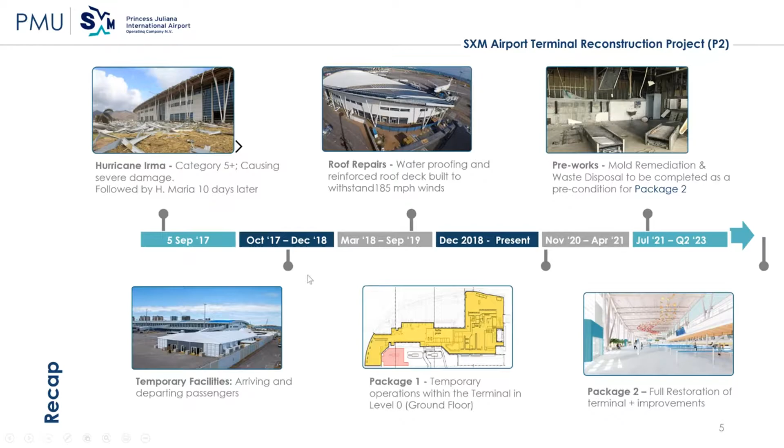As we all remember, Irma hit back in September, the 5th it says here, but it actually was September 6th. Category 5+ that created so much destruction as it went through. I don't believe any of us expected our airport to look the way it did the day we walked through, the following day after that hurricane. I myself, looking at these pictures, still don't believe it, even though I've looked at them so many times already.

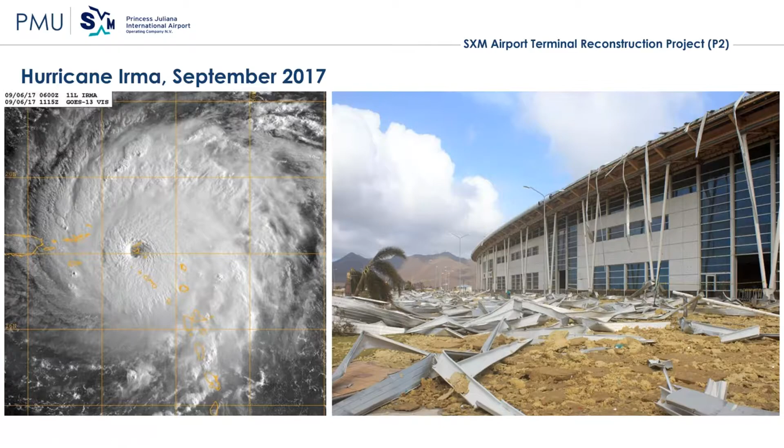But being the resilient airport that we are, we went ahead and opened the terminal back in October of 2017. We put up open tents where we had a makeshift check-in area, screening, security procedures—everything was put in place to allow us to open up.

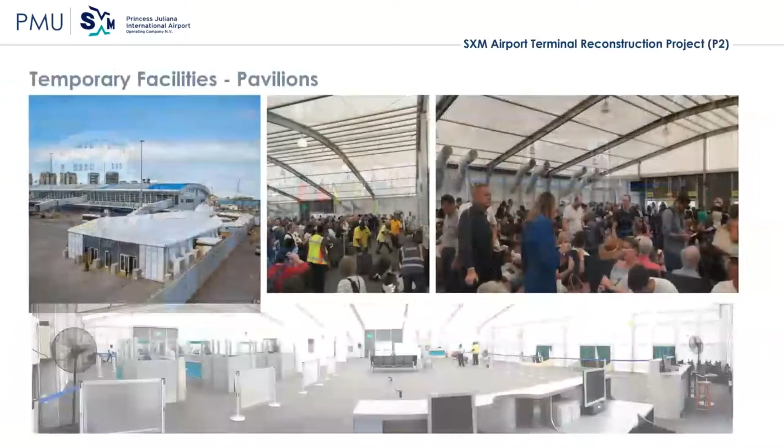Do you all remember we also used the FBO for arrival passengers? That sounds like ages ago, but that's what we did to make sure we had commercial flights coming back to St. Martin. That was not a very comfortable situation. Eventually, we had some large tents we referred to as the pavilions, put in place to ensure we had more air conditioning, more space, and could also accommodate some concessions. But as you can see here, that slowly got congested as well.

At that point, while we were still in the pavilions, we started working on the roof. The roof repair works were put in place, going through 3 phases until completed, from March 2018 all the way to September 2019. The first portion was cleaning up the roof. We started with rust proofing, as well as waterproofing the roof, which allowed us to start with Package 1. In phase 2, we also put in some omega profiles.

That's something like the rafters in your house, on top of the roof. We put in insulation, and we strengthened the roof from 130 miles per hour up to 185 miles per hour, so it's significantly stronger. Last but not least, in phase 3 we put in the soffits, the under portion of the canopy, as well as the bull noses, the round caps around the edges. We also put in infrastructure for some lights, so at night we can light up the canopies.

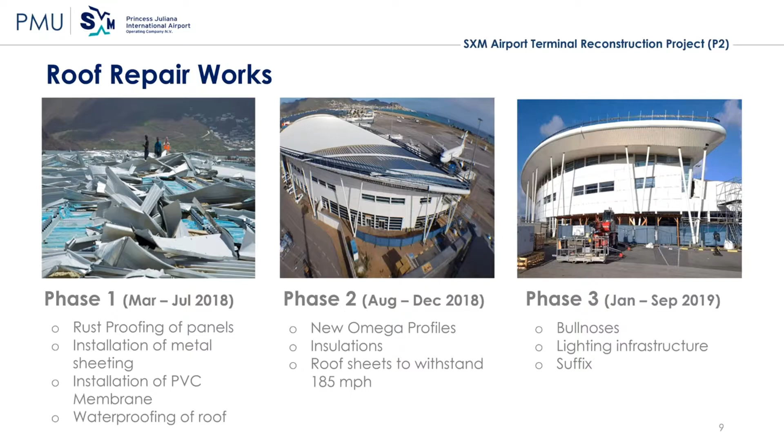Eventually, we were in the building, package 1. Package 1, as you all know, that's what we're living right now. We're only using a third of the building, and it's only the ground floor.

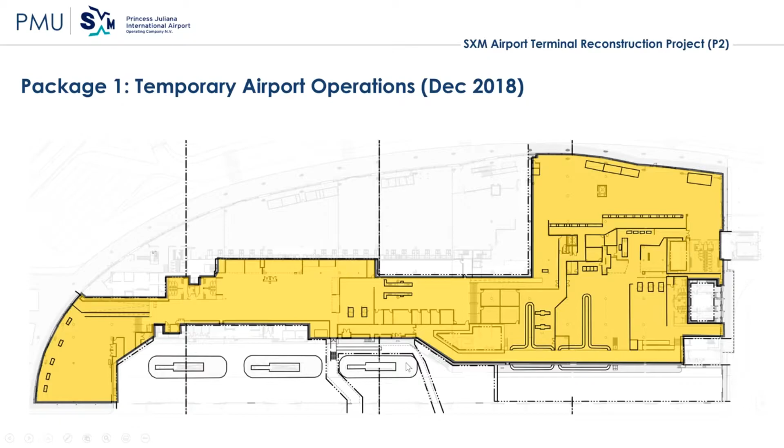Eventually, package 1 was not large enough, so we moved over to package 1A, where we put in the temporary extension to the B gates.

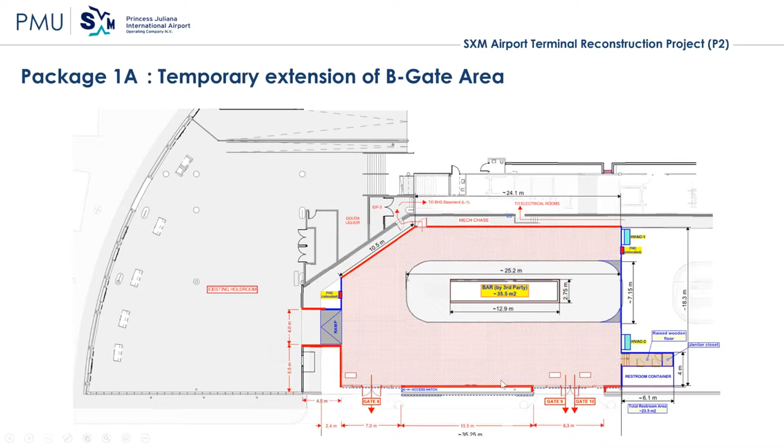There, we were able to get 3 additional gates, an additional restroom, and a bar. The whole area was air conditioned. Basically what we did was we took what used to be the baggage makeup area, removed a belt, and created a very comfortable waiting lounge. I'm still amazed at how beautiful the fixtures came up on the wall.

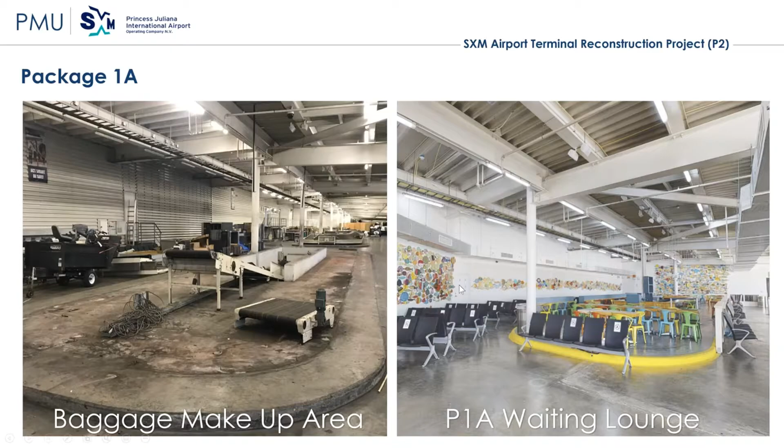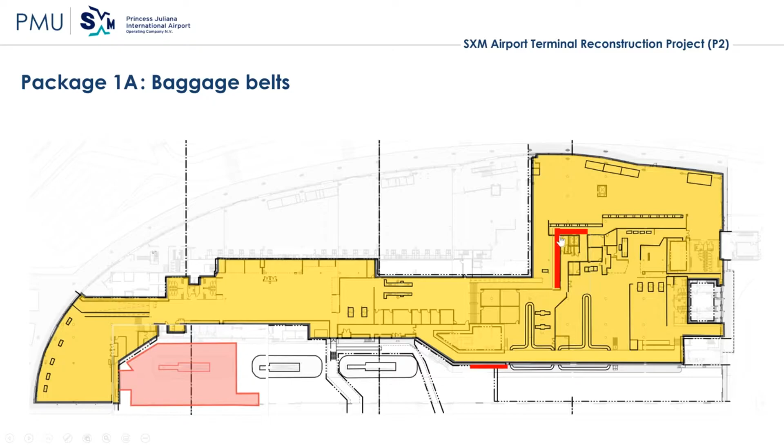During that same extension to package 1A, we also put in some infrastructure for Menzies, because all of the bags normally were taken from the front, walk through a narrow corridor to the screening belt that we have, and that was a very congested walk. Took quite a while, and by using some of the belts that we had in the old check-in area, we relocated it to package 1 and created an easy transition for bags now to move from the check-in counter to the back in screening.

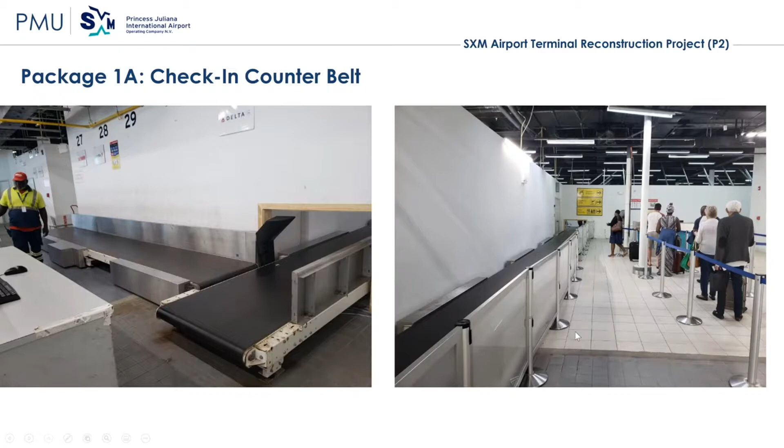Then we're ready for package 2. But for us to be able to do that, we started to team up with the World Bank. So let me give you a little bit of information on what's going on there.

Back in September 2019, we got the approval for the World Bank loan. In December, we actually signed it, but it did not become effective until April 2020. When I said effective, that means the funds were now available for us to be able to start using.

With the World Bank and the EIB, we came up to $129 million. 122 million, 50 from the World Bank, 50 from the EIB, 22 from the World Bank, plus our counterpart, 7 million, came up to 129 million.

The funds were given from the government of the Netherlands, plus the EIB, because the World Bank is actually the one who's dealing with the money from the government of the Netherlands. This was actually given to the government of Sint Maarten, and the World Bank is the one managing it.

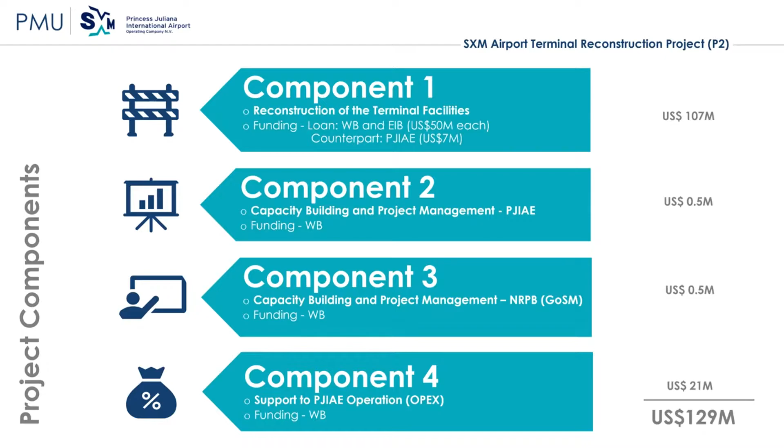The project goal is to safeguard the project, making sure safety and security is carried out, because this is a project we will be phasing from one location to the other. We need to ensure that we do not break any of the safety protocols, and security is still up to par. We also have to make sure that we remain within budget. We're trying our utmost to ensure that cost overrun does not play a part of this project.

We also need to ensure that the local contractors get an opportunity to participate on this bid. If you go to our website, sxmairport.com, there's a tab construction. This will allow you, as a local contractor, to register your company. This has been shared with those who are bidding, so they know which local contractors were actually interested. This was a partnership with the Chamber of Commerce, so we made this link available so that the bidders will be able to tap into the local market.

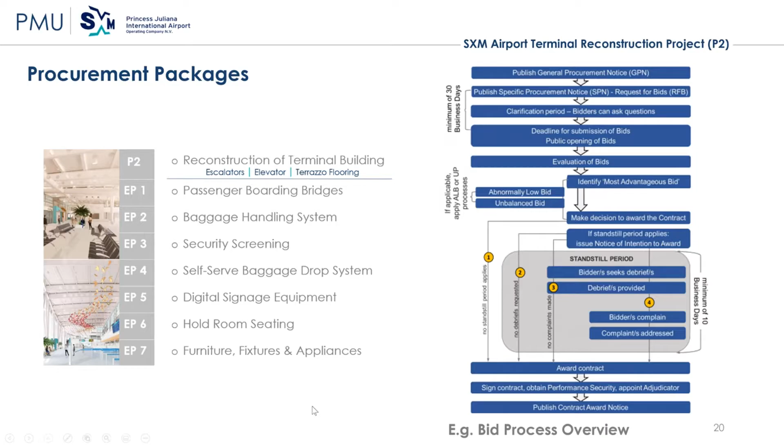Because of the World Bank as well, we needed to ensure safeguarding through the environmental safeguard framework, which is from October 2018. In there, we had to put in our COVID-19 safeguard strategy, where we are ensuring that we screen our workers, maintain physical distancing, how we're going to be able to sanitize, and ensure that COVID-19 protocols are carried out during the project. We also needed to include a grievance redress mechanism.

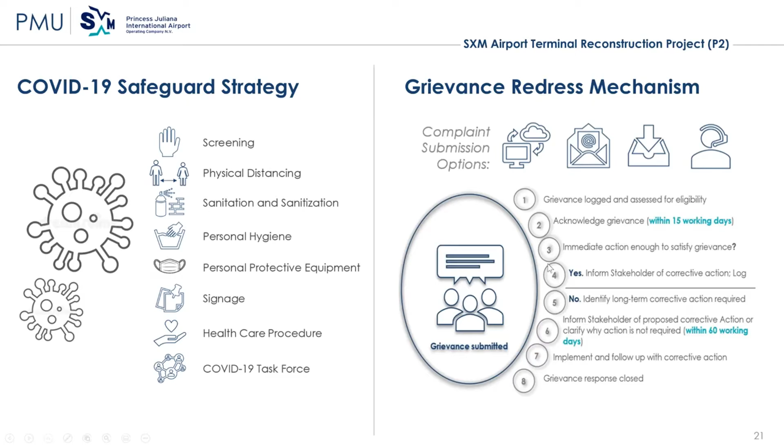This is a complaint form. Anyone who is associated with the project, or even anyone who wants to complain about the project, be that airline workers, staff in the airport, or someone from the community that has a problem, a question, an objection, or a concern about the project, can log on to our website at sxmairport.com. Under the documents, you will be able to file a grievance with the airport on the project, and we will get back to you within 15 working days. We have a full team that's going to be reviewing all of these complaints to ensure that none of them slips through the crack. And every quarter, we file something called an environmental monitoring report that actually highlights any of the grievances that we have received. So it's a very transparent process.

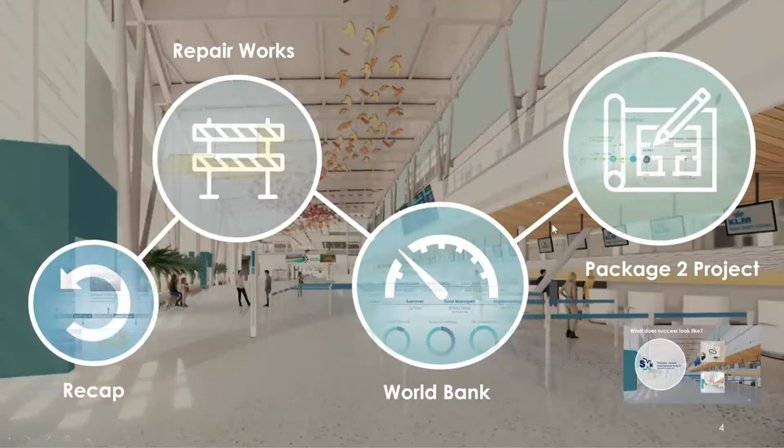So where are we right now? For package 2, before we can start, we need to do some pre-works. As you all know, when package 1 was initiated, the sprinkler system was put into operation, but the sprinkler system in the non-operational area was not. That was a requirement by the insurance that when construction is starting, we protect the building to ensure that while construction is ongoing, the fire protection is there. We brought in Pro Engineering installers back in November 2020 to start that process. They repaired the pump room, they repaired the sprinkler system, and I believe they're just about ready to hand over the project to us. Very near completion at this point.

We also needed to take care of the mold within the building. So back in June 2020, we sent out a tender for mold remediation and waste disposal. We had quite a number of local as well as international contractors that bid for that. AAR actually had the best bid for both mold remediation and waste disposal. We were able to put that particular bid and project together, and in October we were able to sign that contract with them. They started in November with the intention that 150 days later they would be completed in April. They're pretty much ahead of schedule. They were working with some local contractors, which were Tidal Wave, All Caribbean AC, as well as Caribbean General Contractors.

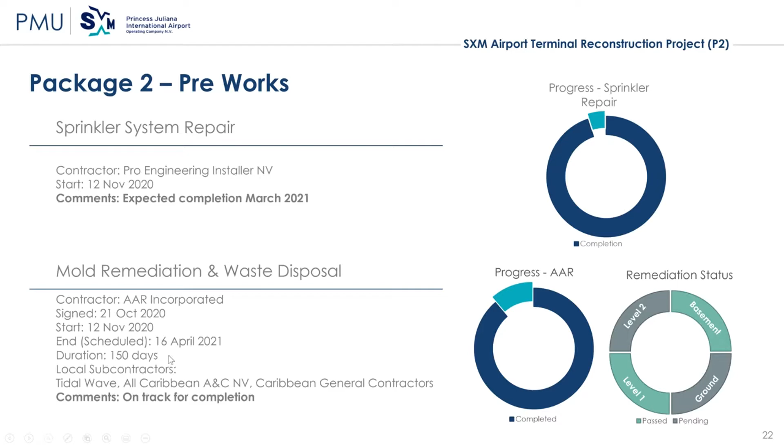For the project management itself, PJIAE first put together a project team. I think you guys will recognize most of the folks within this forum. This was the team that took all the requirements from the stakeholders, be it the airlines, the concessionaires, the retail, the car rentals, and immigration, customs. We had numerous discussions, were able to put the design together and get it approved, and at that point start the implementation of it.

During the execution of the project, a project management unit was put together. This is the team - of course there's some locals as well as some foreign, some international workers that came down to assist on the project.

We will still be working along with our designer, which is Corgan. They're the ones who were here during package 1 - they designed package 1 with us, and they're designing the drawings for package 2. They will be here to assist during construction if any design work needs more clarification. We will also have a supervising engineer, Royal Haskoning, joining us. They will be monitoring the execution of the works, and we're still now waiting for the contractor to come on board.

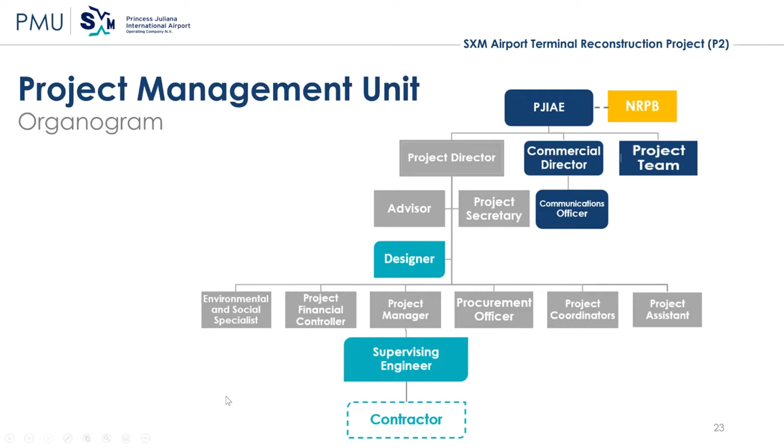Project timeline - this is a bit of a long one, I can say it's been a long time we've been looking at this timeline. The mold remediation, as I indicated, started in November. We expected to finish in April, so that is pretty much taking care of itself.

For package 2, we started in October where we sent out the SPN, which is a specific procurement notice - World Bank's acronym for the start of the tender process. We sent that out on the 26th of October to numerous bidders. If you go to our website, sxmairport.com, the construction tab, we have everything laid out there on what all of the bidders were able to do - they were able to log on to that platform and receive all the information.

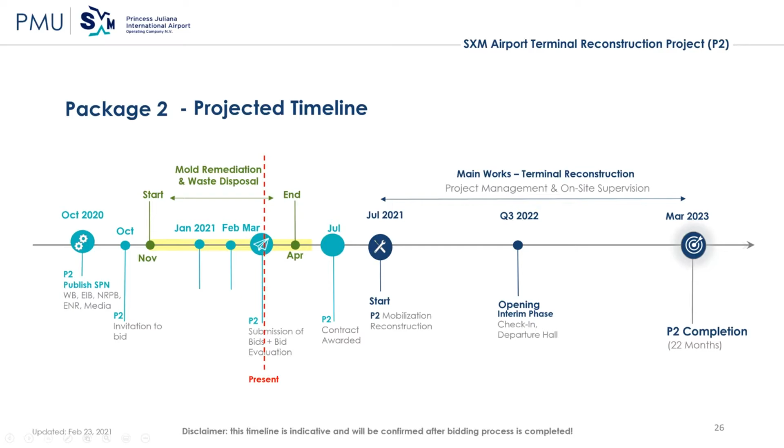The bids are now expected to come in the 23rd of March. In April we started doing our evaluation, with the hope that in July 2021 we'll be able to have the mobilization and start of the works. March 2023 is the planned completion date. This year will be updated once we have the contractor on board, when we can plan exactly how we're going to phase the job for the contractor to carry out.

I just want to dig in a little bit here so you can understand what all we were doing during October to now.

In October, when the bids went out, November we had something called a pre-bid meeting. Virtually, we logged on with all of the bidders who were interested in participating in the project. We had something called a Matterport camera, where we mapped the whole building - you can now virtually walk through the space. We mapped level 2, level 1, ground floor, as well as the basement. We spoke with the contractors and let them know exactly how we expected them to send in their bids, what our expectations were, as well as shared those details with them. While that was happening, we also gave them the opportunity to ask questions on the bid.

RFCs, requests for clarifications - we received a lot. In November 2020, we received over 125 questions. The second time we received over 72, 51 questions. In total, up to January, we received close to 270 questions.

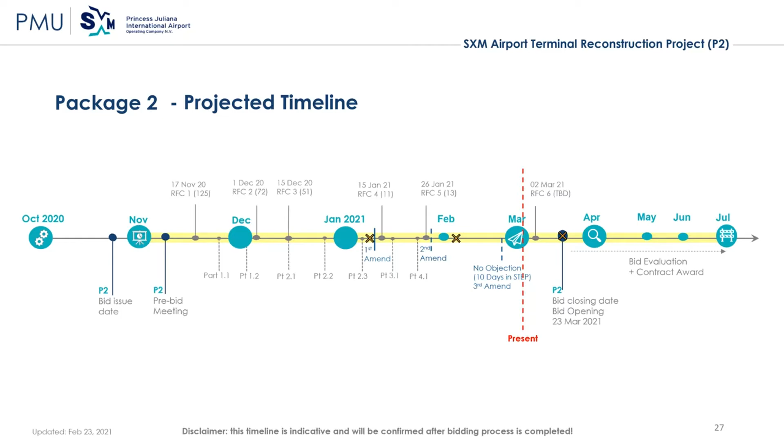As I indicated, there's quite a bit of improvements that need to be done. Some of the upgrades we did was strengthening the roof to 185 miles per hour. We're going to be strengthening the doors as well, because those were the first thing that got blown in during the hurricane. The floors, which we're trying to save, but with all of the construction, movement, and redesign that's going to go on, the floors were no longer something that we could salvage, so we're going to upgrade them using terrazzo. That's an old type of flooring, but very durable.

That's going to cover the tiles, so we're going to rough up the tiles so that the terrazzo can connect very well to them. That's going to be the new flooring, which will give us the opportunity to make some designs in the flooring. The building monitoring system will be updated, as well as better floor space.

We're living, should I say, working - I felt like we're living in this building because we've been here so long. We've worked in the building for the last 15 years, and we know what worked and what did not work, so we had the opportunity to make some modifications on how we're going to be using the space.

We had discussions with different stakeholders, and there are some enhancements for the passengers. Passengers who are arriving will now be able to go to escalators at the bridges. They'll be able to, when they arrive, use escalators instead of only the stairs or the elevators. There's also going to be check-in kiosks - before we had about 12, we're going to go up to around 30.

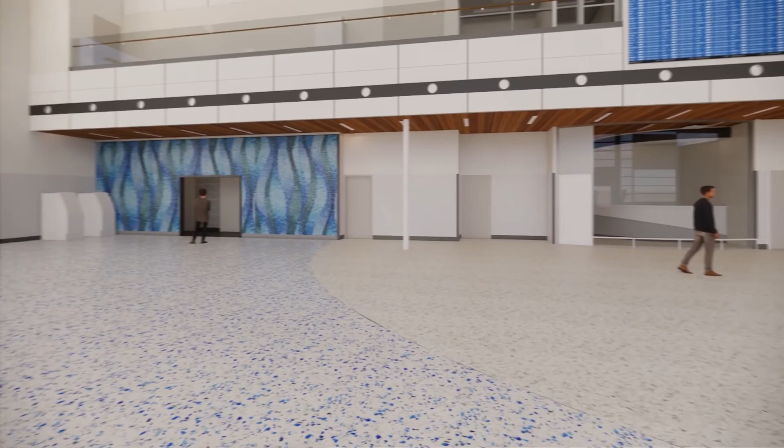Our next meeting we're looking at is for March 23rd, 2021, which just happens to be the date we expect the bids to come in. In the morning, we want to give you a little bit more information because this was really a high-level overview on the bidding process, where we are in package 2, but there's so much more information that we can provide you guys.

We want to give you a little bit more information on equipment packages, as well as some of the changes, the improvements that we have done in the building, where we can kind of walk you through floor by floor on what the changes are in the building.